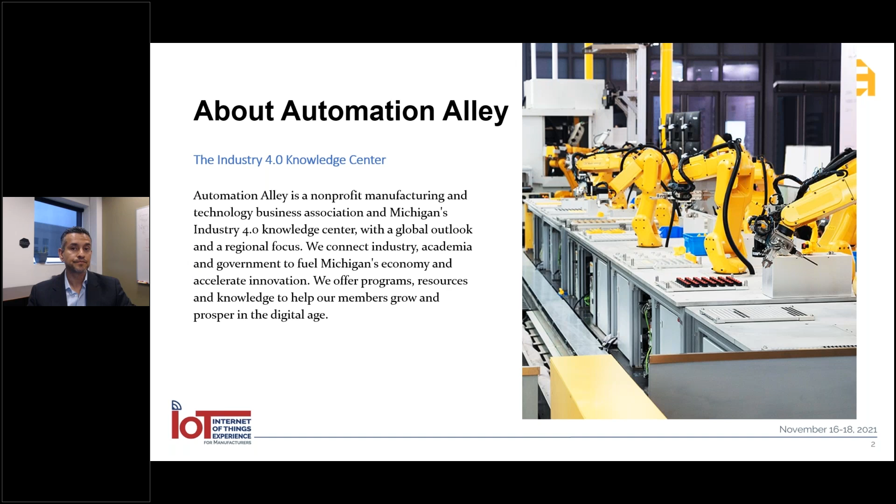So Automation Alley, we're a nonprofit in the state of Michigan. We are the Industry 4.0 Knowledge Center for the state of Michigan, and we've been on this path to help our ecosystem navigate the complexities of Industry 4.0 since about 2016. And along the way, we've learned a few lessons. Our core focus is really just Industry 4.0, but we really focus on manufacturing as our beachhead because that is actually a very large component of our GDP in the state of Michigan.

And the first question I like to point out is, why should you care? Why should a manufacturer that's done really well over maybe 30 years, 50 years—in some cases in our state we have companies over 100 years—why should they really care? The reason is because Industry 4.0 is the biggest disruptive force for organizations that we have seen. It truly is a revolution, not just a little shift. It truly is a quantum shift, and we'll see why as we go down this presentation.

But the first question I'd like to point out is, why do companies get disrupted, right?

So what happens is when companies become successful, they end up having an operational focus. They become really good at doing something. And then sometimes there happens to be a market shift. And if they're not ready to navigate that market shift, then it has deep impact on business viability.

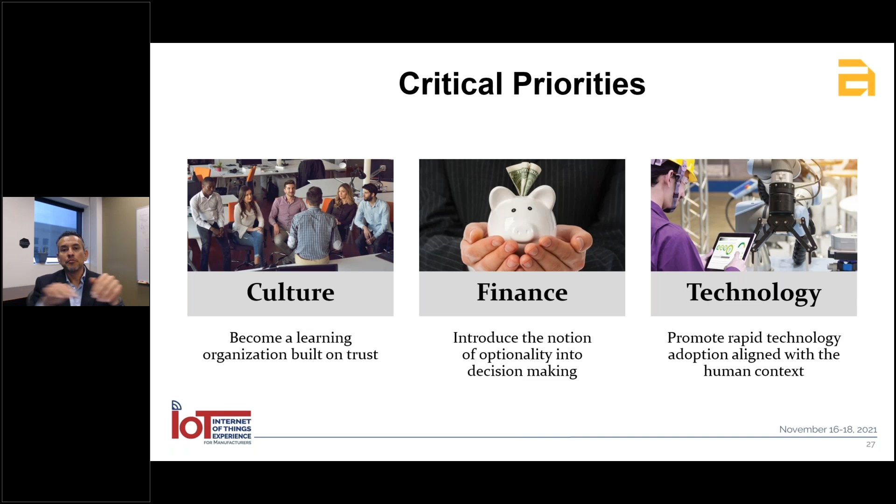And then finally, what we need to do is understand what is that technological arc that can be aligned with the human context. What is that customer experience, and how does the technology drive that? Those are the three pieces that we look at in terms of the critical priorities.

So with that, let's take a look at this case study I want to share. Two case studies. This one is on Netflix as an organization. I'm sure everybody in the audience knows Netflix. Netflix today is producing all kinds of movies, but when they started, they were in the DVD rentals by mail business, and this was in the early 2000s. They were really a fulfillment shop. They really knew how to very efficiently deliver DVDs by mail to customers who had put them on a DVD queue.

But from that, they graduated and evolved into third-party streaming. They were basically streaming third-party content in the mid-2010s. And now that meant they were a cloud services business. They had to really ramp up their cloud services capability, understand how to deliver tons and tons of video content online streaming. Today, however, they're an original content producer. They are actually like a studio, and now they're very much into the production of original content.

So how did they make these changes? That's three different business models. And interestingly, that first business model of DVD rentals is still actually something that they have — a few million customers still get their DVDs by mail from Netflix. So they've kept these two pieces, and they've now started this third business model. Well, how did they do that? They did that by being a software-first company. They started off as a software company that happened to do DVD rentals, then happened to do third-party streaming, and now happen to make original content. So that's an example of a company that has successfully gone through three different business models.

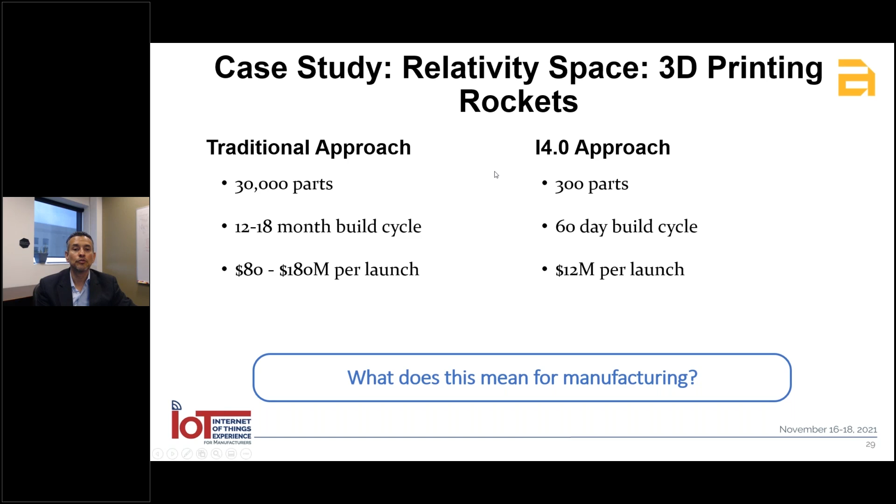Thanks, Pavan. Yeah, excellent, lots to cover when we talk about Industry 4.0. I know that some of the companies in our audience today are using 3D printing. I've seen it in the stamping and fabricating shops for prototypes and tooling applications, maybe for some maintenance and repair applications on the shop floor, but many are not. So what kind of advice would you offer to those companies that have never experienced or experimented with 3D printing, in terms of the ROI perspective? How expensive is it to get into, for sure polymer, but even metal, and the ROI companies can expect, the types of applications that you've seen?

That's actually one of those things, right? So if you've never done it, and if you're not convinced, buy a small printer and play with it. It's not going to produce production quality components, but it's going to start giving you ideas, some really interesting thoughts in terms of where this could go. If you have a little bit more faith in the technology, buy a production-ready printer. There are now production-ready printers that can make components that can actually go into usable parts in the less than $15,000 range. Some of them are even less than that.

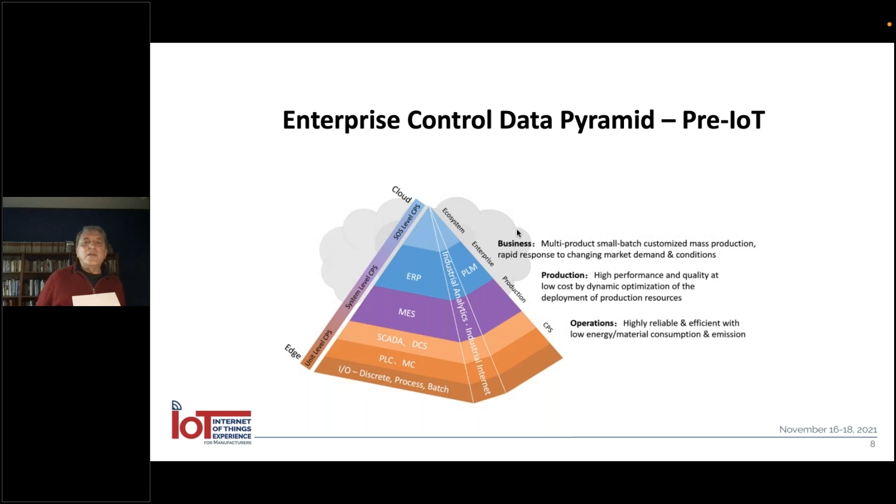I'm a controls person, so we had something called the Enterprise Control Pyramid. Nothing like Maslow's pyramid, thank goodness. But the people in the room when this was invented didn't think it was going to last as long as it has. All I wanted to show here was, in a past life in controls, automation, digital software, people visualized data flowing pretty much one way. We had the physical layer, the I/O, discrete process batch stuff, and data flowed up to the control level, then to some sort of SCADA level, then to an MES level, and so on. That was the paradigm for a long time.

So this, I call it Internet of Things equals connecting things equals a data explosion, which is why we need servers and maybe buying a big chunk on AWS, remote cloud servers, because we're going to store it, but we're going to store it because we can use it.

So I want to tell a story. This is a refinery story, but don't worry about it, it is applicable. It's just one of the best Internet of Things case studies that I've run across. But the story includes a party van, coyotes, insurance companies, an IT department. Oh, and it's about refining, flammable materials, and safety.

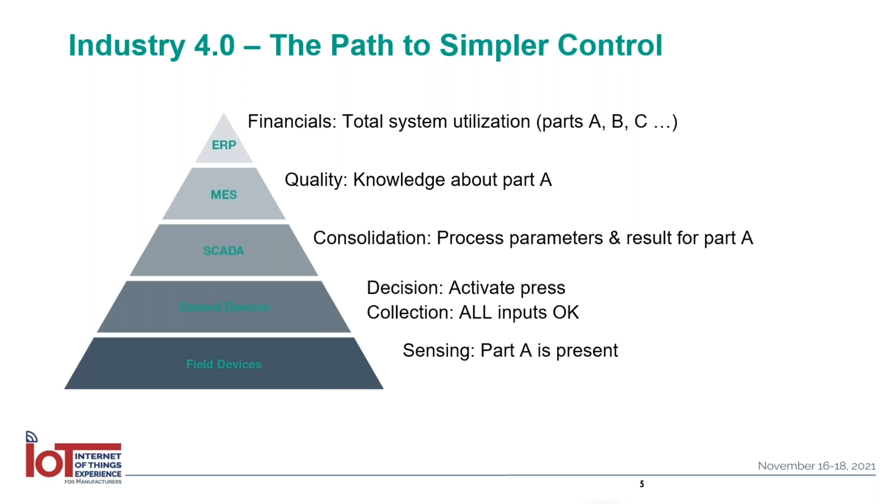Field devices, for instance, are where one would identify the presence of a part. Then the control devices, PLCs for instance, take in that information and make decisions. Should I activate the press when all the inputs are okay? The PLC will then consolidate information and move it from SCADA to MES, maybe even up to ERP, where financial decisions are being made. How am I doing in terms of parts utilization? What have I produced? How much waste did I have? And so forth. So this is the model we've all been used to.

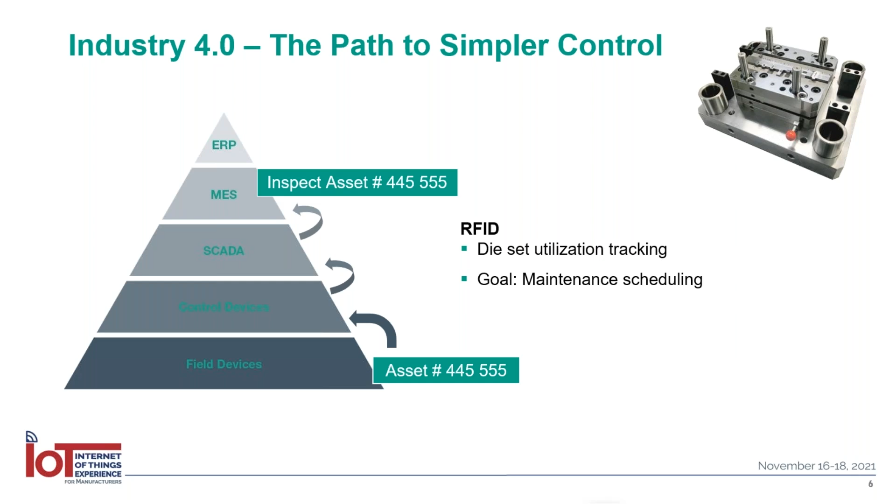If I break this down to a couple of examples, specifically think about an RFID tag being utilized on a die set. If at the field level we identify this asset by some asset number that's part of the RFID system, we can move this information through from the PLC to SCADA to MES and determine the utilization. The goal is to be able to determine when maintenance is most advantageously handled, before something breaks down, before something goes out of alignment.

Another example is vibration sensing. Vibration sensors can provide information according to this ISO standard I'm listing there. On the right side, you see a table that tries to classify what type of machine will run well, not so well, or actually goes into damage mode at what levels of vibration. So we can configure the system, determine what the vibration values are, and pass them through the system.

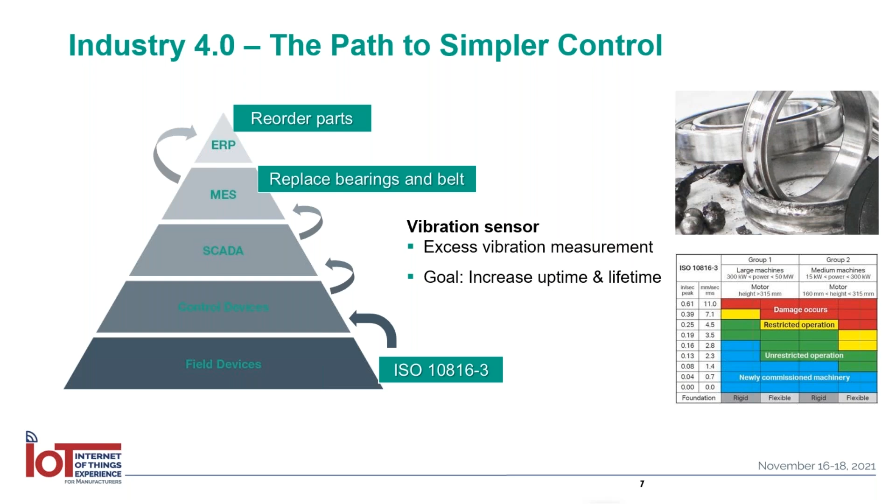The goal again is to replace, let's say, a bearing or a belt in time for this machine to not even run into downtime. And then ultimately, at the ERP system, when this information is available, reorder the parts so that we're never going to run out of this bearing, or never going to run out of the belt that's needed to keep it running well. So information is passed up and down this pyramid.

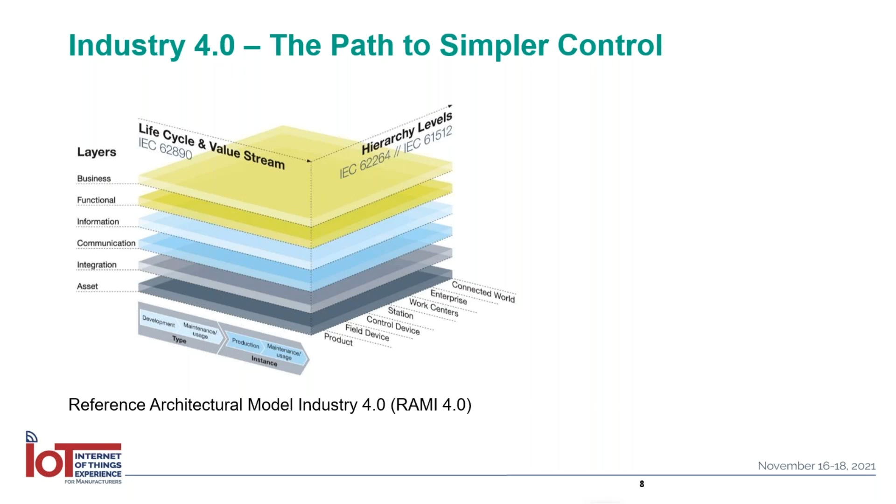In the RAMI model, the world is a little bit more complex, or I'd rather say a little richer, in that we still find this pyramid structure along one axis - these are all the layers of the pyramid. But what is very different is that we don't have to bring data from one to the next, not from the field device to the control device to stations to work centers and so forth. Communication can now occur essentially in any direction between any two participants in the setup.

This is extremely useful because it makes data flow so much simpler. I do not have to bother the PLC to take in data from the field and send it up. I can have the field device make information available, and anybody else that needs it at any point in time can directly communicate with this field device. So this is what is considered a flat IP network - everything puts information out there for everybody else to use at the right moment in time.

Another new aspect of this model is that we're now considering the lifetime of an asset from development into the full utilization part. I will today focus on the second phase, when a product is an instance - it's no longer just a catalog item, it's a specific sensor, a specific PLC, it could be a specific cable. And what I'd like you to see today is something that was worked on over the last few years. We call it the digital nameplate.

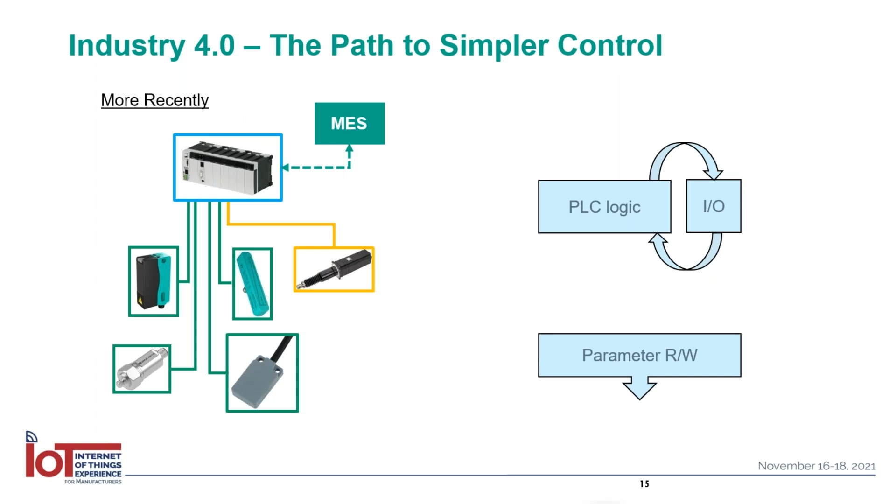Now, more recently, some smart people thought that's really not a good way of dealing with hardware. It would be much better if the PLC had the ability to change configurations of hardware on the fly. That allows us to automate, highly automate, replacement procedures. So one product gets replaced, and the person that does the replacement no longer has to really do anything with it. Put it in operation, and the PLC identifies that something new showed up, and it downloads the parameters. The rest of the operation, the logic, the I/O consumption, setting of outputs, is exactly the same.

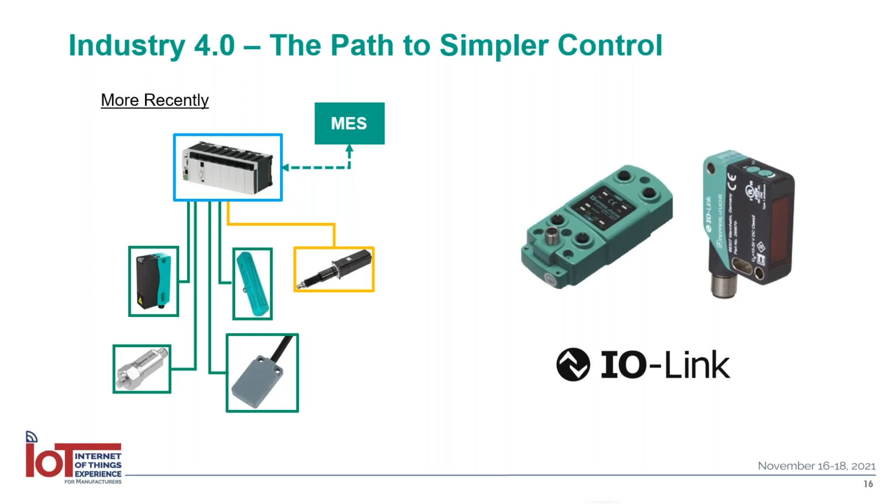And most of you have, of course, heard of IO-Link. IO-Link is a low-level point-to-point communication scheme between controllers and sensing products. Sensors can be, just as the word implies, photoelectric, inductive, capacitive, but could also be RFID systems, or stack lights. All of these kinds of products can be configured by the PLC to do whatever needs to be done. So here's an example.

I'm showing you there an ultrasonic sensor, and this ultrasonic sensor... did I lose my connection? Brian, can you still hear me?

I can hear you, but I cannot see your presentation. Okay, well then, wow, that was weird. I have no idea what happened. I gotta... you're on the phone, right? No, I'm going through the audio connection. So let me, hopefully this picks up where it left off. Okay, I'm sharing again. Now, would you? Yep, you're back. Oh, all right, I'm glad it happened.

So these are two ultrasonic sensors, and what can happen here is that via PLC command, via PLC control, the beam pattern, the beam width of this product can be changed on the fly between every single product if necessary. It's very easy, go wide, go narrow. So this allows us to focus the ultrasonic beam to match the product we're producing, and therefore we can have various products running over the same line. They could be quite different, and the sensing technology can be adapted to the needs of this production step.

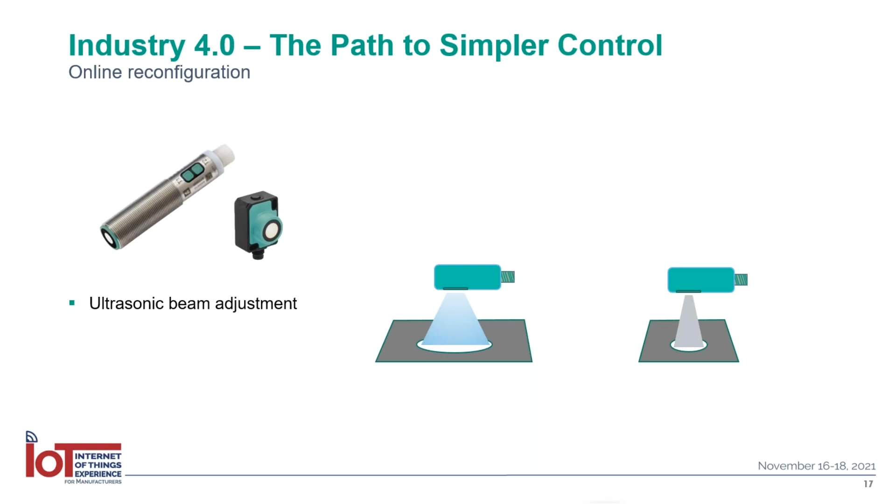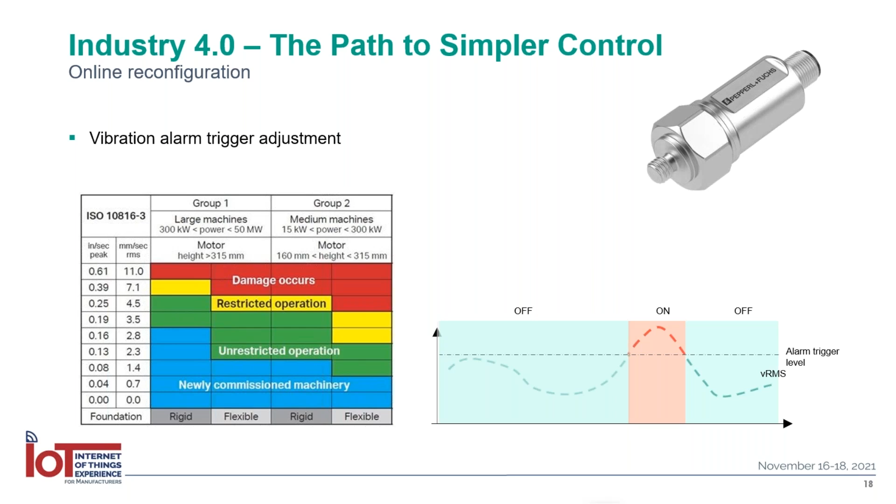Another example, already mentioned, vibration sensors. Vibration sensors will measure, for instance, the speed, the VRMS value of the machine, the vibration spectrum, and it's possible to set trigger alarms. Similarly, via this IO-Link methodology, we can change the allowed or accepted level where this alarm will trigger. So we can make this dependent on certain functional aspects of the system.

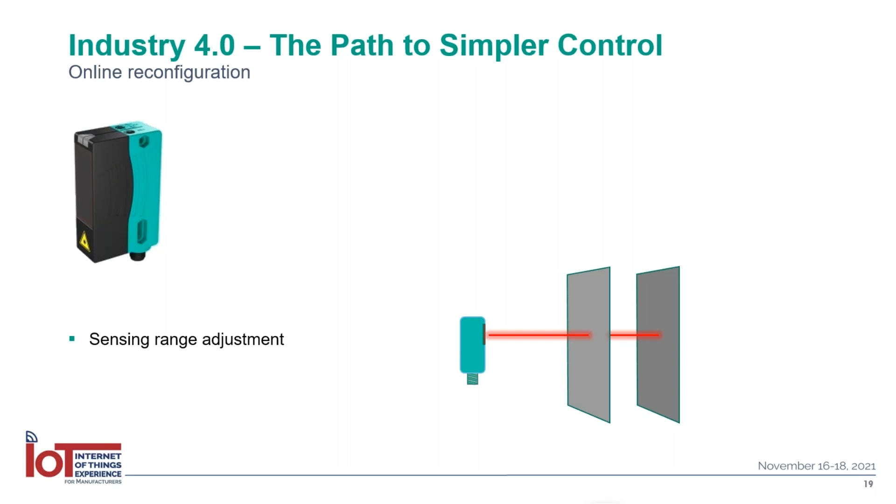Another common example is changing the sensing range of a photoelectric sensor on the fly, switching between near range, say 0.5 meter, and far range, 1 or 2 meters, whatever the technology allows. My last example shows a rotary encoder where the pulse rate can be configured via PLC control. Sometimes short pulses are useful, other times much longer pulses between so many pulses per revolution. This flexibility comes with IO-Link sensors.

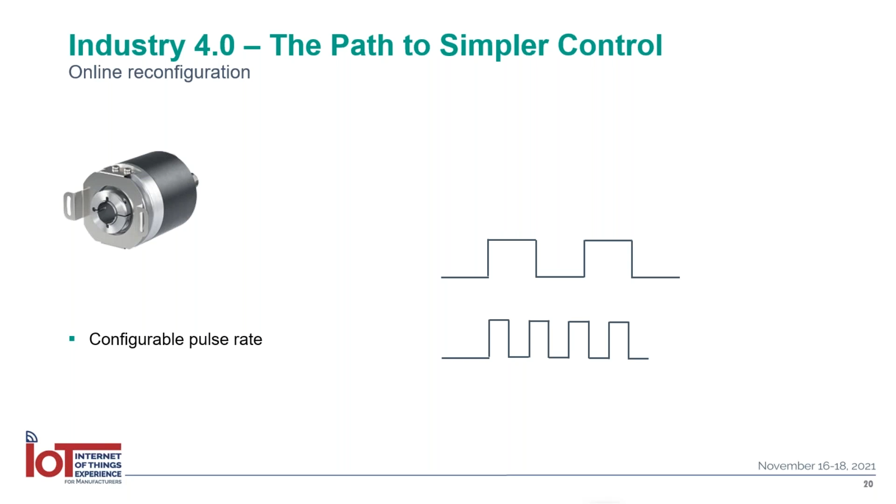If we go to the next picture, this is the now and today state, and we're going to expand this even further. The difference now is that we're separating control that runs on the PLC from configuration and ingestion of feedback information. We're utilizing IoT technologies, OPC-UA, MQTT, Modbus, REST interfaces to make changes to the product without having to modify the PLC. At the end of the day, the outcome at the sensor level is exactly the same.

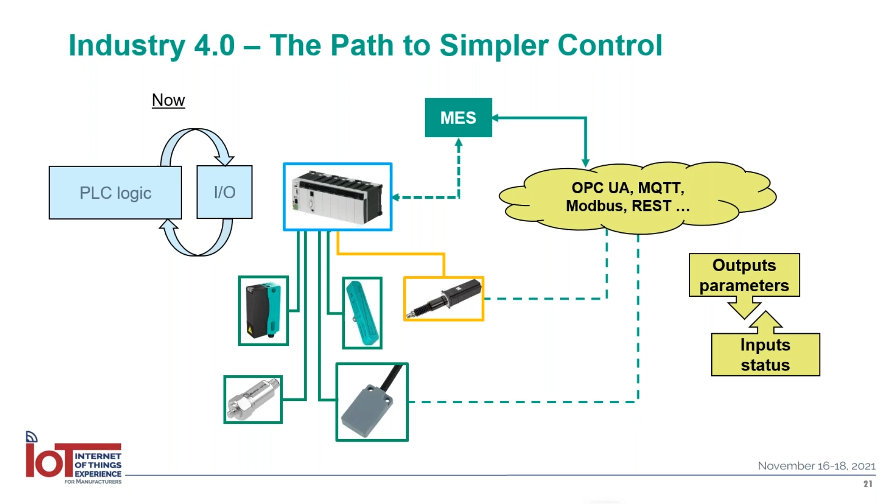The sensor is set up to do something specific to the process. The major difference is that I don't have to use the PLC to do that any longer. I can use modern high-level languages that make it a lot easier to make these changes, then get it down into the sensor via these technologies. In parallel, I should mention this requires zero additional wiring, and I have some pictures that show that.

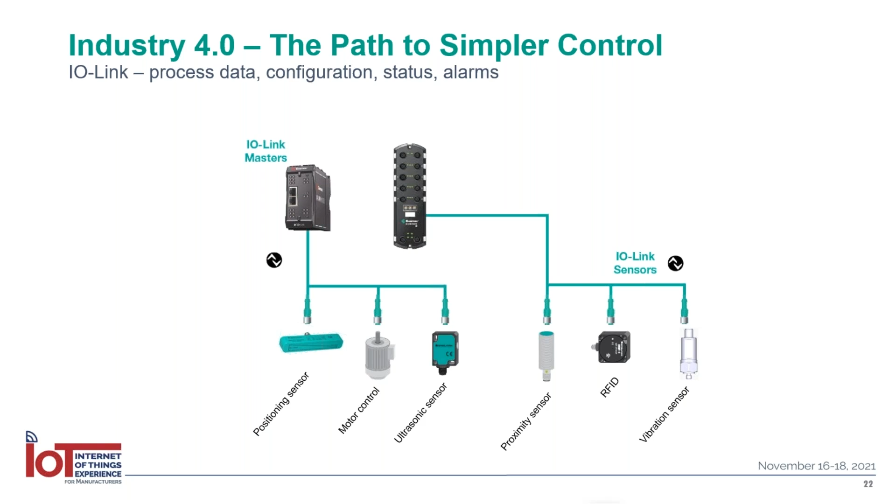Here is an example of an IO-Link master, actually two IO-Link masters, and a number of products connected to those. These products feed data into the master, and these IO-Link masters make this data available to the PLC. The PLC could be essentially any type of PLC, we really don't care, we're very sensor or PLC agnostic. Could be a Siemens PLC, Rockwell, Mitsubishi, you name it, any type of PLC that talks one of the supported higher level protocols of these IO-Link masters.

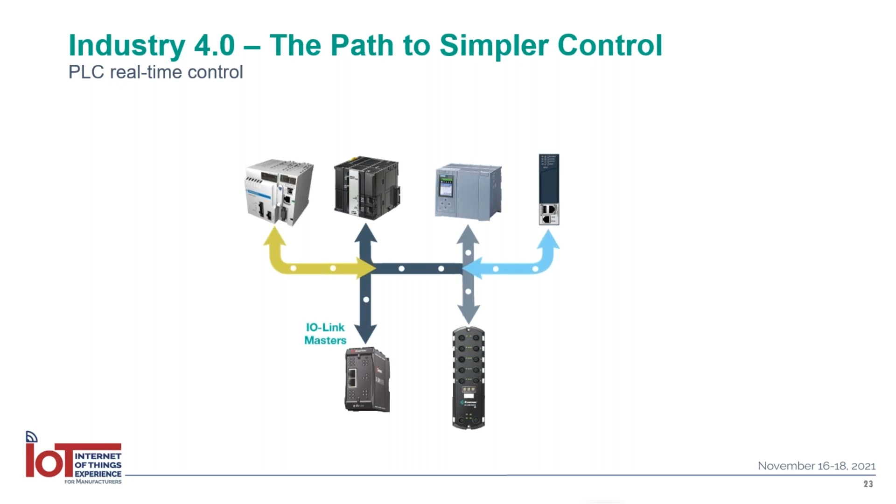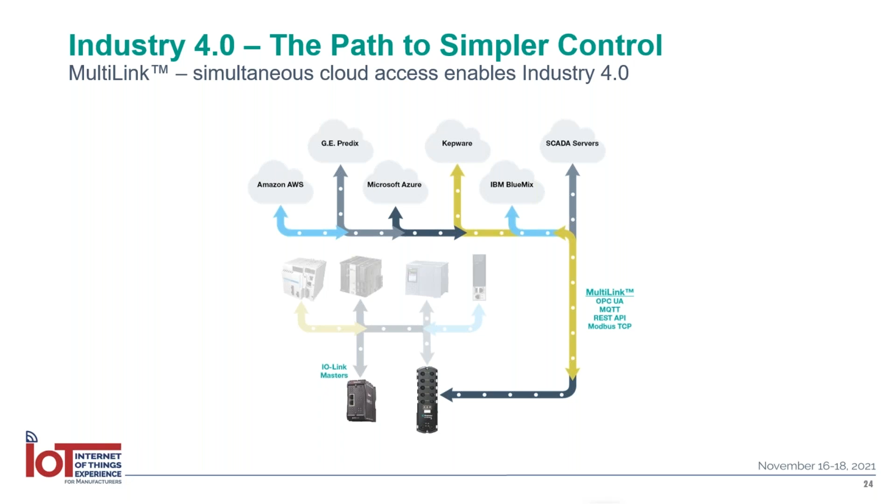Now this parallel data channel that runs on Ethernet using the idea and concepts of flat IP networks can retrieve any of these additional data points that these sensors may provide. They can retrieve other data, exactly the same data as the PLC already gets, and they can take care of configuration and diagnostics, again without having to wire anything specifically to these products. So this is what the end picture is like: from the field to the PLC, we go the standard route via real-time control networks, Ethernet IP, Profinet, you name it, but to the cloud we go in parallel utilizing IoT-centric protocols. The MultiLink technology we've implemented allows us to do this in parallel.

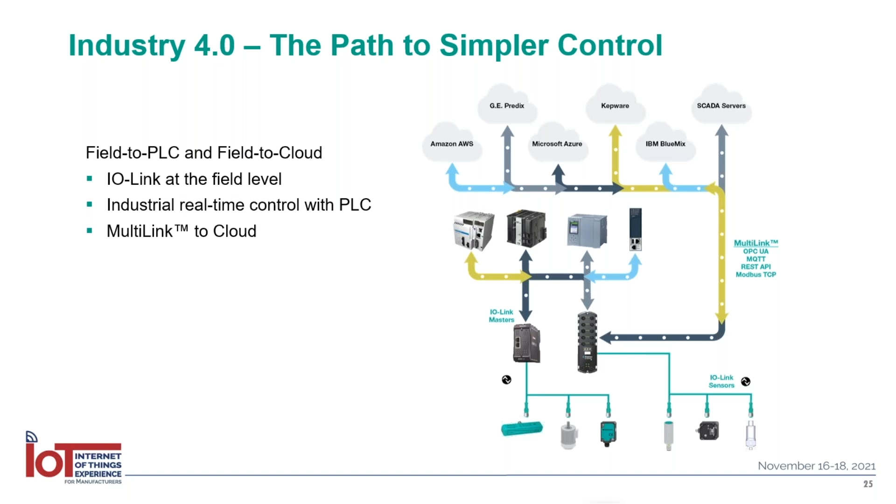So that's that part. The other part dealing with enhancements to sensors is the digital nameplate project, Icebreaker. Icebreaker was an event by a number of companies to prove that we can have instance information about a specific product available on the internet in an easily retrievable format - instance management, digital nameplate, according to IEC 61406.

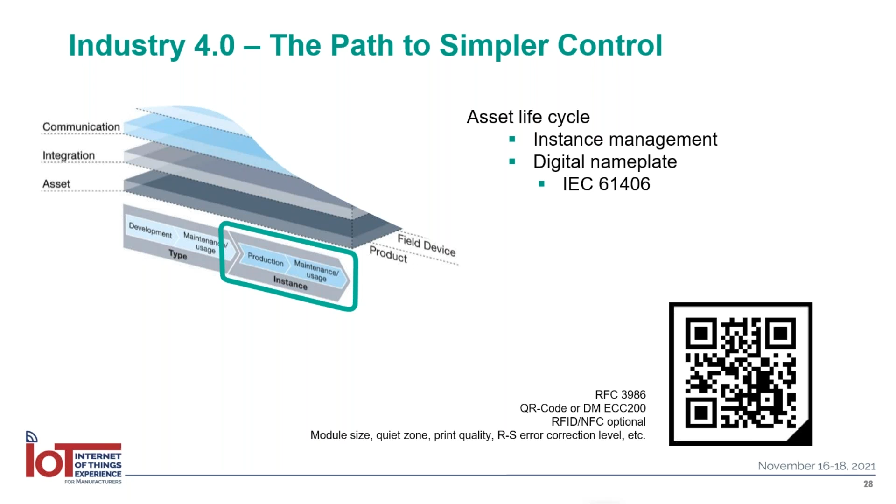What does that mean? It means that a product will now have a QR code, and that QR code links to a database specific to that product. So two items that look exactly the same, for instance a photoelectric sensor, will not have the same QR code because they are ultimately different instances of this product group. You can take a photograph with your smartphone of either of those two codes, and they will lead you to a page specific to this product.

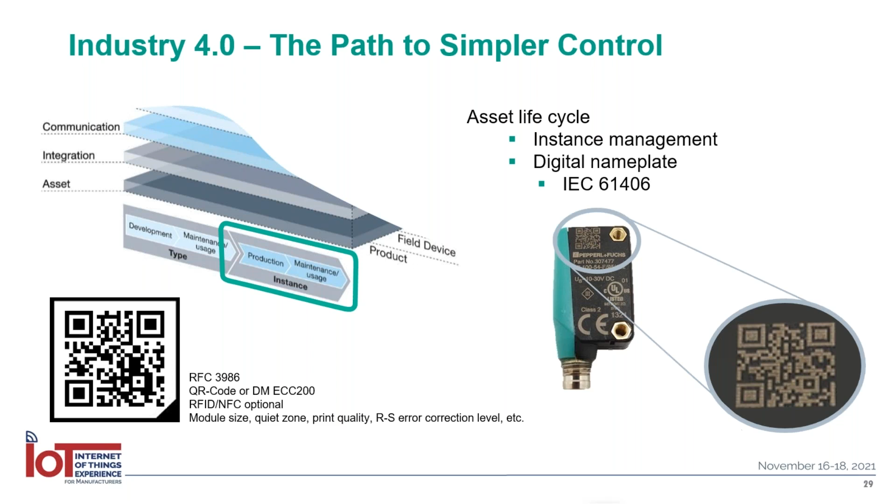I'm going to keep going on one, two, and three. Hopefully someone has done it. What that will do is load this page, and this page on first glance looks very much like the standard page one would find on our web page. But what's different here is, as part of this trial, we now show the serial number and year of construction of this product.

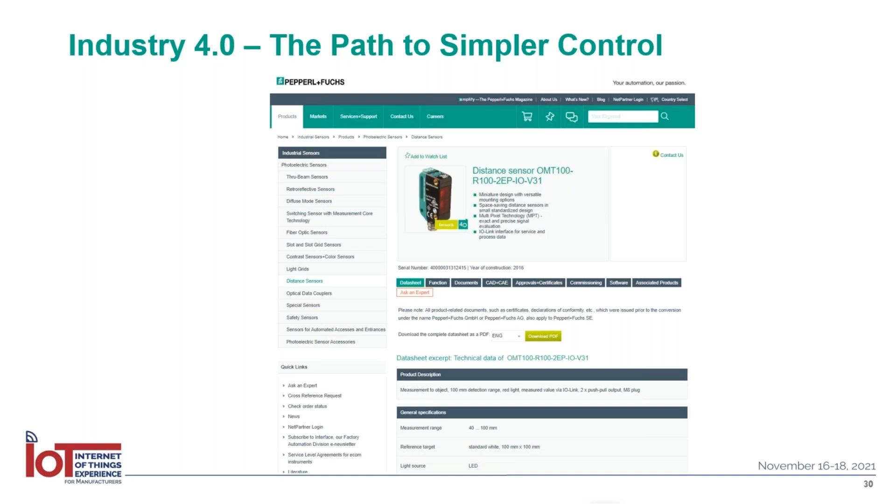Right now, this is, in my opinion, not very pretty, but the point was: can we set everything up behind the scenes so that a customer, a machine owner scanning that QR code, can come to the page and retrieve all the information required on a family basis - data sheet, approval certification, software associated with this product - while also having this very specific serial number and year of construction information. This is not limited to those two numbers, we just used those out of our internal database to prove that in principle it's possible. There's a lot more information we could put out there, we don't right now, so this is just the starting point of this project - the digital Icebreaker project, digital nameplate.

Now, as a machine designer, you can have access to this information and turn that into your own information that you would provide to your customer. So it follows the onion shell idea of the digital twin: take some information, add more, add more, add more, and make the onion grow.

Last section I want to talk about is a few more examples on sensor advancements and how they help with respect to predictive maintenance. What can these new products in conjunction with IO-Link really do to enhance processes?

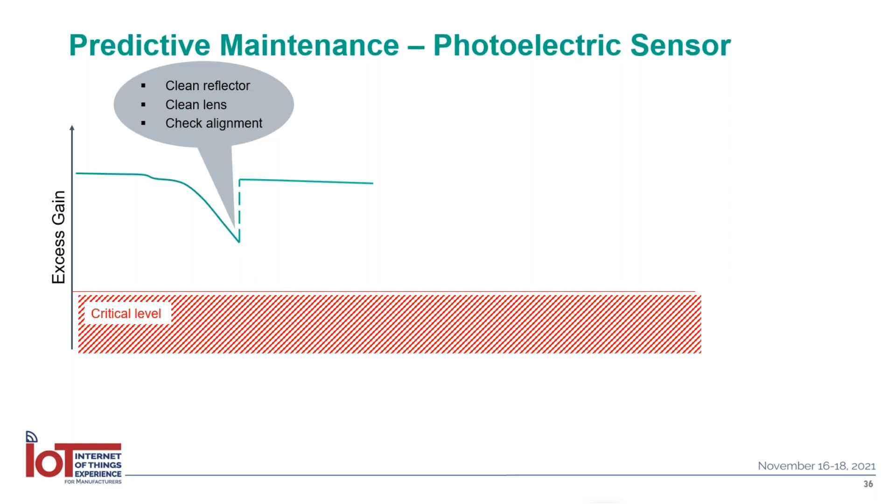So let's say we did send this message out and someone went there and cleaned it. Machine never stopped running. We're back to normal. And then all of a sudden we have such a sudden drop. Now that's a different scenario.

Whereas a gradual drop predicts or has to do likely with dust or some other pollutant. When you have this sudden drop, likely we have something being knocked out of alignment. And so now we're definitely going into the critical.

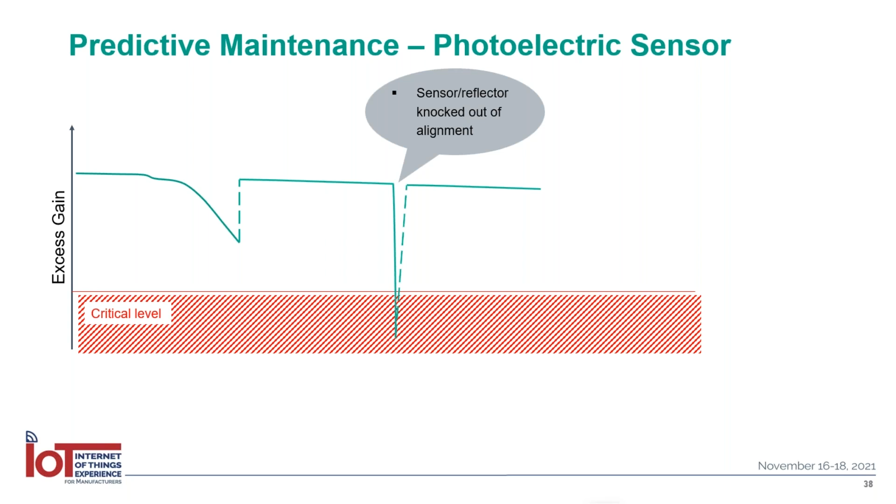We can't help it, it's too late. But we can help maintenance by giving them hints. Please check this. There's a certain likelihood that this has nothing to do with dirt, but it has something to do with alignment. So they fix it, we're going back up, everything is good.

Now, what did that whole scenario, that entire story that I told you, what does that look on the output side, the digital output that goes into the PLC? So as long as the sensor is above the critical level, the excess gain is above the critical level, the output will function. Nothing is going to happen as long as we get in before we reach the critical level. Once we hit the critical level, then the output is no longer able to follow the signal.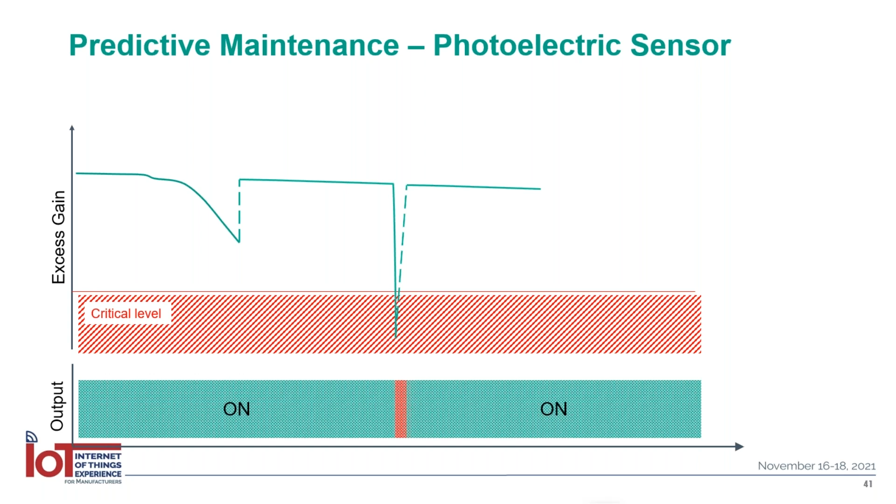So we fixed this, obviously, so we remain running. And then here, for the short amount of time when we go below the critical level, the output is unfortunately off. So this is one way of helping diagnose and prevent a problem.

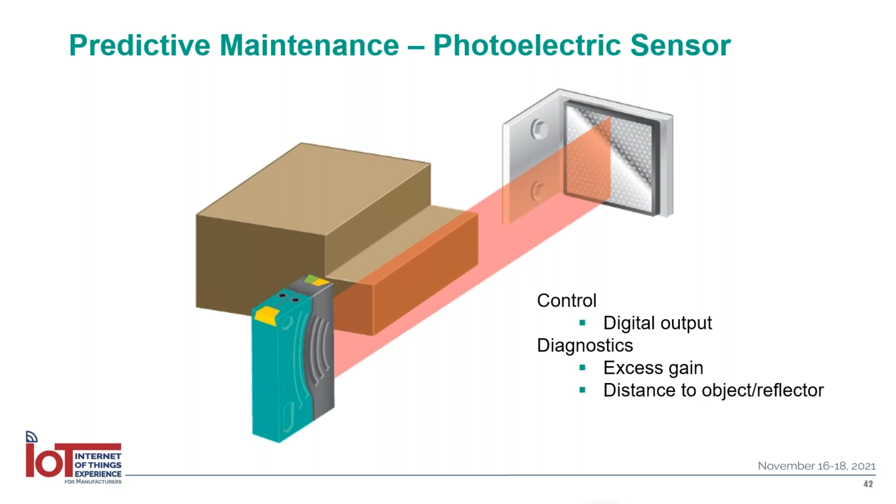The other thing that these sensors can do is they can actually measure distances. They're not just looking at return signal, but they can measure the distance not only to the reflector, but also to the object. So if you think about it, when this object goes through the beam, what happens? You see sometimes you measure the distance to the reflector, and then sometimes you measure the distance to the object.

So there are two ranges, there are two specific cases that are of great interest. One is pre-collision. What if an object were to be detected that's coming too close to my sensor? Collision is never good because it destroys the product. You have to replace it. You're down for a while.

Similarly, if something goes out of range, what could be the reason? Well, one reason could be that vibration shook everything loose and the reflector is not fixed anymore, and it could essentially fall off eventually. So this is a case here where we have a pre-collision. This item is clearly too close. It has not yet hit the sensor, but we don't want it there. This would be an alarming condition.

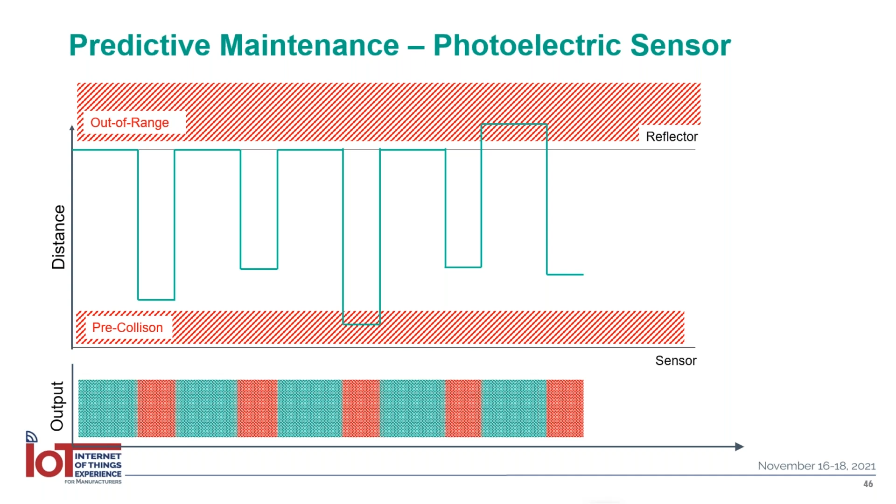And similarly, when the item appears to be that far away that it's out of range, something definitely did get knocked out of alignment. And very similar on the digital output level, we would see one state when we see the reflector and the other state when we see the object. And depending on the logic that's applied, the output may be on or off. But again, important is the ability to identify problems, potential problems before they show up.

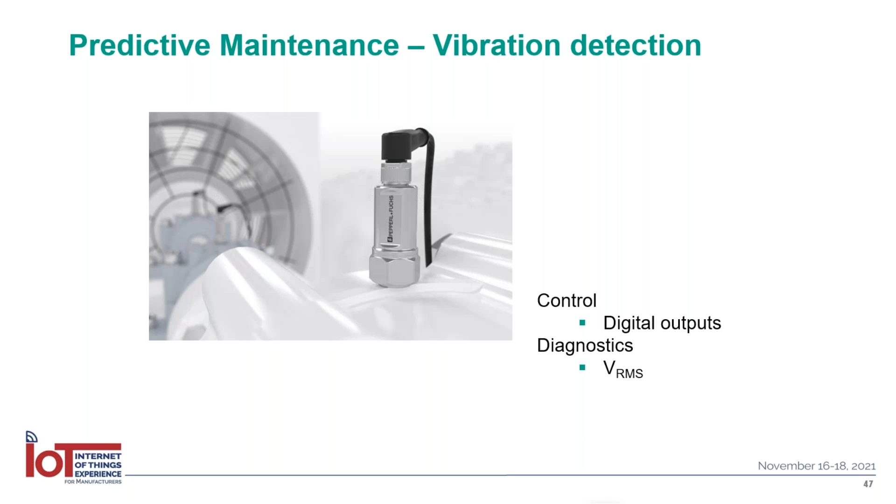Vibration monitoring is, of course, a very interesting and very powerful topic. I already mentioned that we can configure these products to have outputs that essentially give us worst case scenarios. But we can diagnose more, in greater detail, if we look at the true value of the VRMS that is provided.

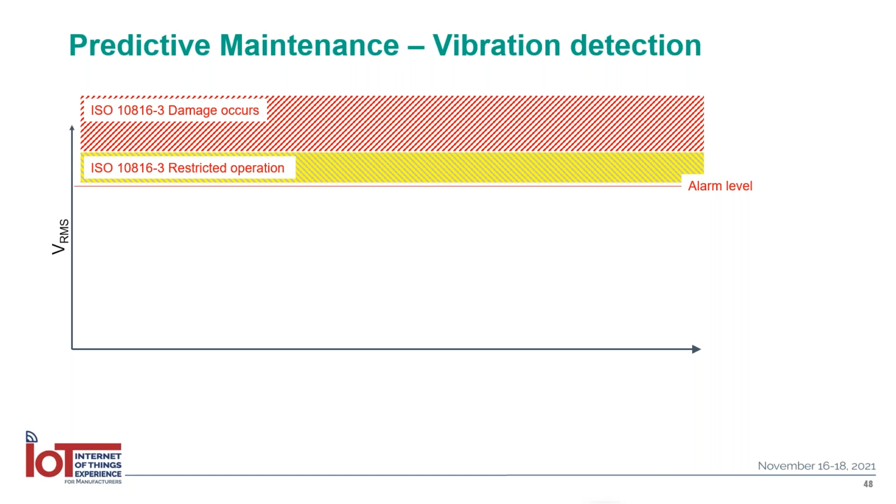The picture that I drew here shows we are looking at two levels. One is, according to that standard, what we would call restricted operation. You may have to reduce the speed of the operation in order to limit the vibration spectrum. And above that, once the vibration goes even higher, damage will certainly occur.

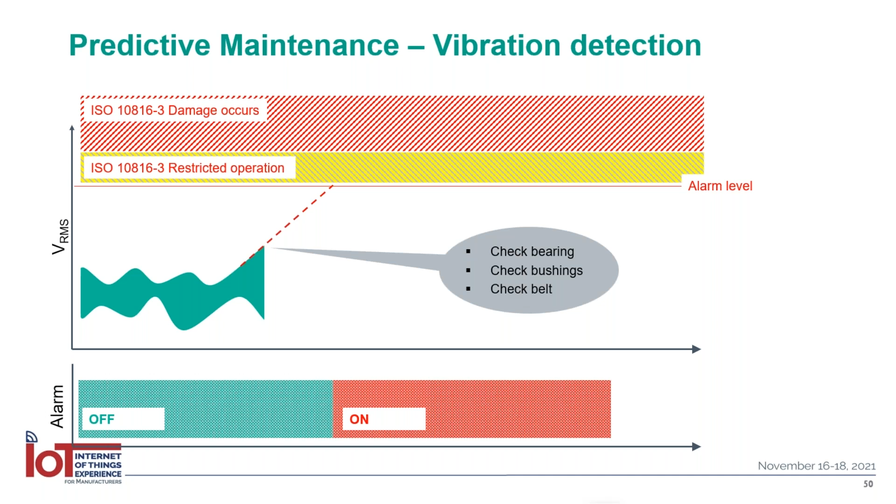From a digital output at the PLC level, as long as we have not reached the alarm level, the alarm output is of course off. There's no reason for alarming until I reach that level. Once I reach that level, the alarm output goes on. That's all fine for an immediate shutdown of the machine to prevent further damage, but it's really not so good if I want to make predictions, if I want to send maintenance out during regularly scheduled intervals anyway. So this would be a much more powerful method.

So let's say they fixed it, and the world is good, because everything is now back in the normal spectrum of vibration that we expect.

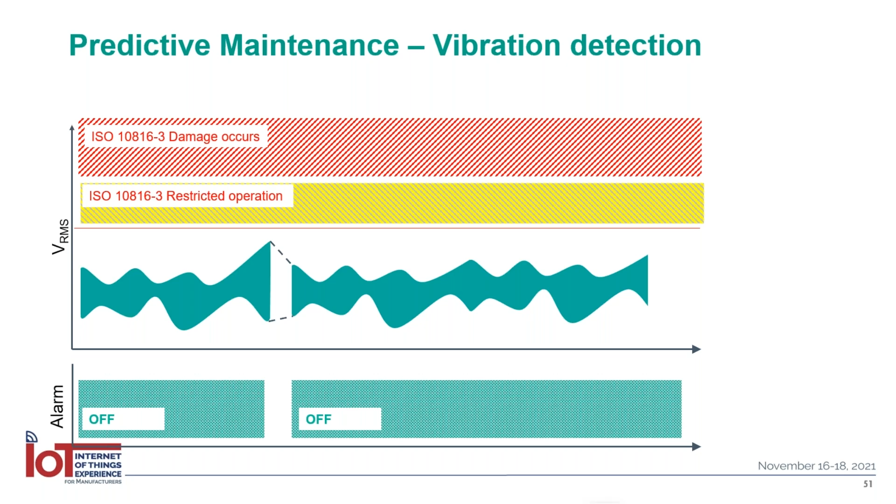Let me propose 3 takeaways from what I'm trying to talk about. Modern sensors allow the separation of control and diagnostics. Not only can we separate it, but we can also feed that information to different systems. By utilizing our multi-link technology, we can have control going to the PLC and diagnostics going to cloud structures or other PCs with much more computing power that can run predictive models. And the component involved in all of this is clearly IO-Link.

IO-Link is the new standard sensor interface in the market. It is growing by leaps and bounds. I dare say there will be participants in this webinar that already use IO-Link and may not even know it, because IO-Link has been around for 10 years and a lot of product has been designed around the IO-Link standard. That's the conclusion of my presentation.

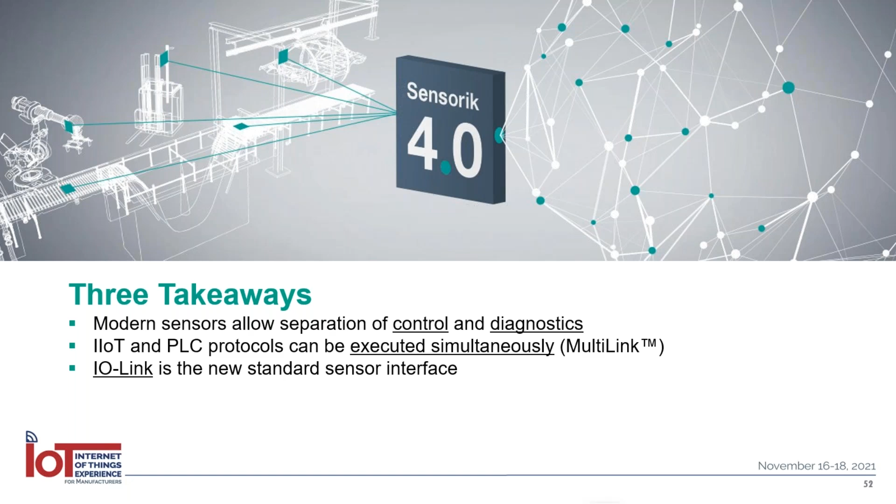Thank you very much for listening, and I understand we'll be having some Q&A now or after Brian's presentation.

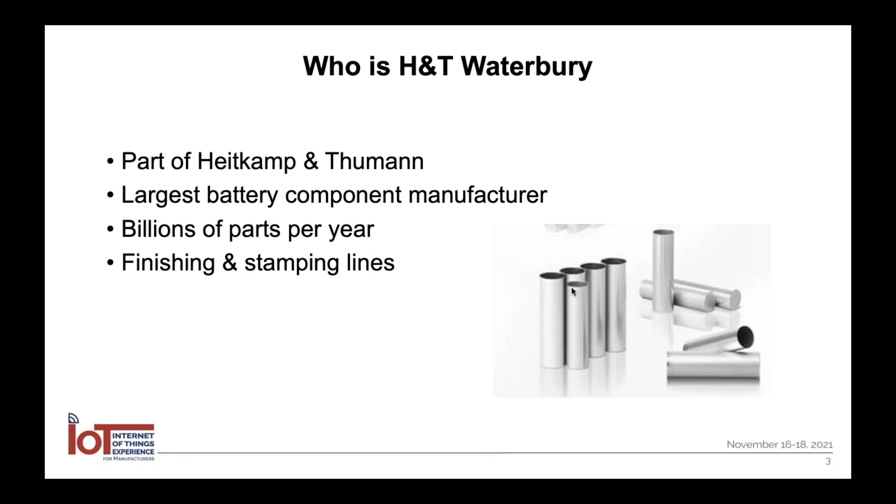So the original challenges that they had when they reached out to us 2.5 years ago was a lack of visibility of what was happening inside of the plant. They had a lot of manual reporting - production, downtime, scrap rates, all that stuff was being reported on paper, summarized into Excel, sometimes tacked up on whiteboards and communication boards. A lot of companies do this. I'd say the majority of companies still do it this way, and it works. The challenge is you don't really have timely access to the data, so understanding what's happening now is a little bit tough. Also, looking at trends over time can be hard if you're trying to pull together, let's say you want to understand what's happened over the last quarter. You're going to have to pull together 120 different spreadsheets or tabs to be able to summarize that data. It's a lot of work.

And the other problem is that if you're looking for really fine-grained issues, like micro stoppages on a line - think a stop of 5, 10, 15, 20 seconds - you're not going to get all those because operators are not going to write down every time a machine or a line stops for 15 seconds. There's an interesting quote here by Spencer Cushman, who's the director of operations for this site and our primary contact and executive sponsor for this implementation. He said, before implementing SensrTrx, we knew there was a problem. We just didn't realize how bad it was until we started collecting the data. This is a very common scenario. We work with a lot of companies that have this same view: we know we have inefficiencies in our processes, we just don't know where they are because we lack the information to really find them.

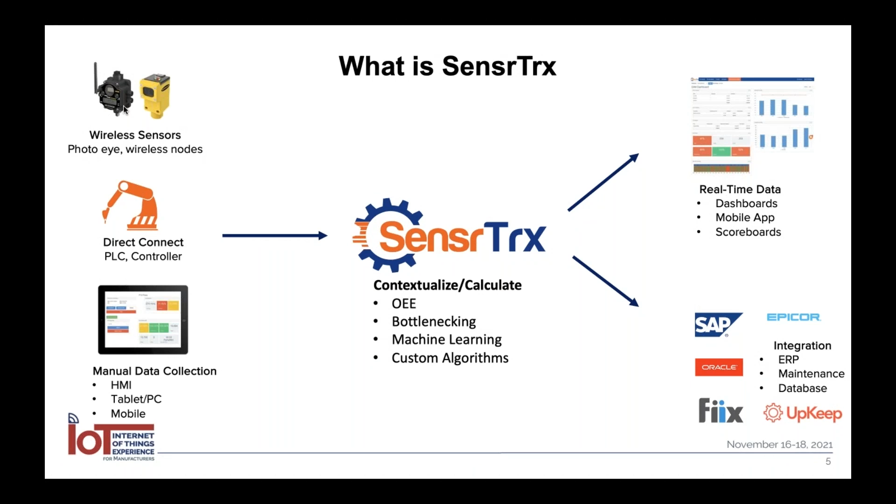But when you're connected to the PLCs, if they have the right kind of information in them, we can derive the reason why a machine stopped and automatically categorize the downtime reason—it's just less information a person has to put into the system. The third way is manual data collection, where anything we can't get automatically, you just enter into an HMI, which makes it easy to do.

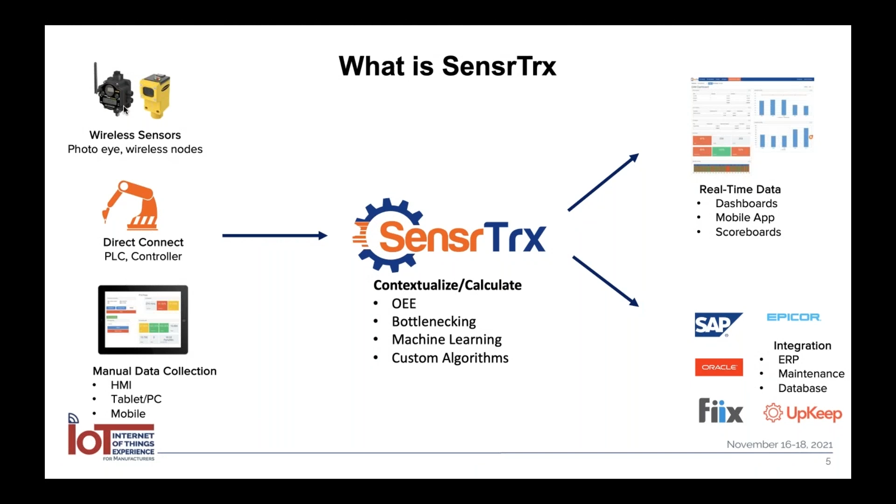And then all that data is collected and flows up to the cloud, where you get different visuals—dashboards, scoreboards, operator interfaces, those kinds of things—so that you can really run your business based on that data. And then we can integrate with ERP systems and maintenance management systems as well. Depending on time, H&T integrated with their maintenance management system, which we can talk about too.

So how do we do this? When the project first started with H&T, they wanted to start in their finishing area, where they put coatings and different things on these canisters—these little battery canisters—and that's where their bottlenecks were. So they knew that if they could figure out what the problems were there and solve those problems, that would give them the biggest bang for the buck for the project.

So all the finishing lines had Allen Bradley CompactLogix PLCs. They contained a pretty good amount of information you could use already to figure out some of these issues—there were faults inside of them to tell you if there was a problem. We could figure out machine state, we could figure out counts, how many canisters were being made. All those kinds of things existed inside the PLCs, but they weren't connected to a network. So H&T Waterbury did not want to run Ethernet to each one of those PLCs.

They thought it would just be too expensive and too challenging based on their environment, but they had really strong Wi-Fi in the plant. So what we did was we got these little Moxa boxes. Moxa box is a technical term, not really, but that's what everybody calls them. It's a company called Moxa, and they make conversion boxes.

So they can connect Ethernet to Wi-Fi. They can connect serial to Wi-Fi. So these are really good tools to connect PLCs that maybe you can't connect directly to your Ethernet network to a Wi-Fi network, or convert serial onto an Ethernet network to be able to talk to those PLCs.

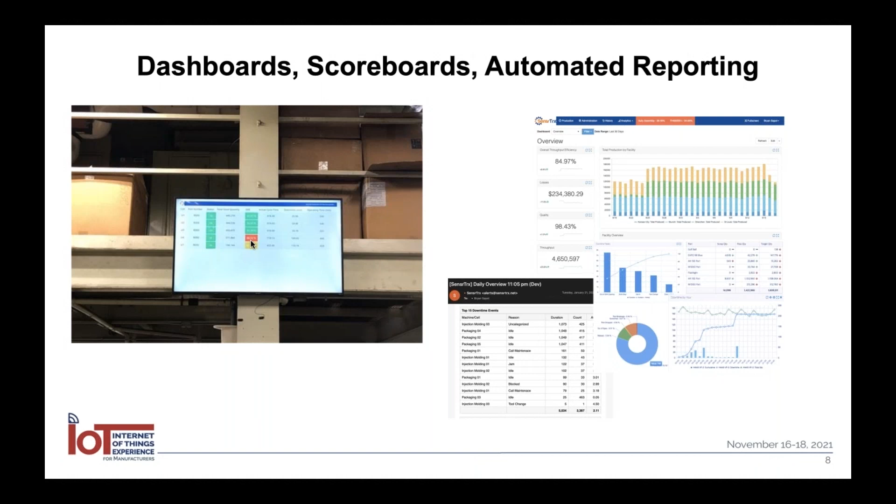Because what they found out was, we'll go into this right now, but they had a backwards can problem. So these emails and these dashboards are really what brought it to light and showed them how big of a problem this actually was.

So what's happening is backwards is kind of a misnomer, it's upside down. The finishing line sprays a coating inside of this canister, and what happens sometimes when the machine stops is a can flips upside down. So you have the bottom of the battery canister pointing up, and the open side pointing down. And if you don't get that coating inside of there, it's a bad product.

The customer has to reject it, and it becomes an issue, right, if you're shipping inferior product out to your customers.

And so what they figured out was they knew that this was a problem, right? But as Spencer's quote said in the beginning, they just didn't know how bad it was. What they found out was certain coating machines were stopping up to 1,000 times a week on a single machine.

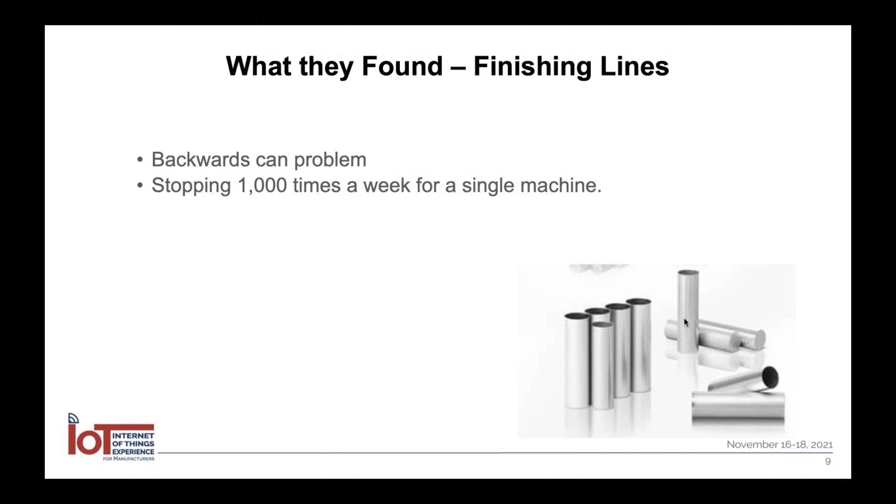And it didn't take very long to reset this, it took 15 to 20 seconds to fix, especially if an operator was right there when the machine stops. The machine knows when the can goes upside down and it stops automatically to make sure it doesn't make a bad part. So the operator would walk over, flip the can over, walk over to the controls and hit start again, and the machine would start up. So 15 to 20 seconds.

But you multiply that out across 4 different machines, it's like 18 hours a week. So it's a lot of time being spent with these little micro stoppages that they knew were there, but they didn't know how bad it was.

And what was interesting was once they got this data, you go and talk to the operators and they would say, does it really stop this much? And it's like, yeah, it's a huge problem. But the operators would never say anything because they were trained to fix it and they were told that it's not a big problem and it stops all the time. But sometimes that doesn't always rise up through the organization to be able to get fixed.

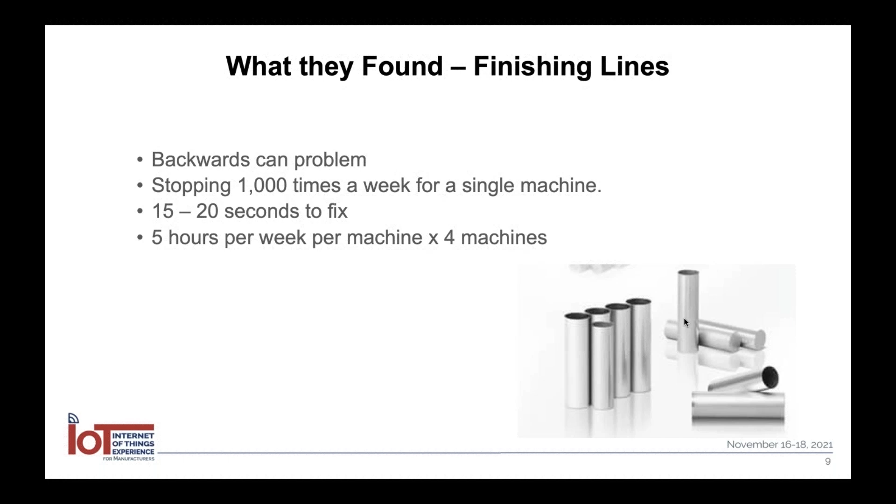And to kind of mitigate this stuff, they were running overtime on Saturdays because, you know, this is 18 hours of lost production time, it's a lot. So they had trouble trying to figure out where the problems were coming from, which is why they implemented SensrTrx. So how do they solve this?

So what they did was set up a Kaizen event to figure out this problem. And they decided that they would get everybody, maintenance, engineering, the operations team, together to do this. And they made little tweaks to the way the cans went through the system and how these air jets work and all kinds of different things. And they iterated on it.

And they looked every day at how many backwards cans they were getting after they made a change. Is it going up or is it going down every single time? And this is really how they fixed it. And this is really how all of our customers fix these things.

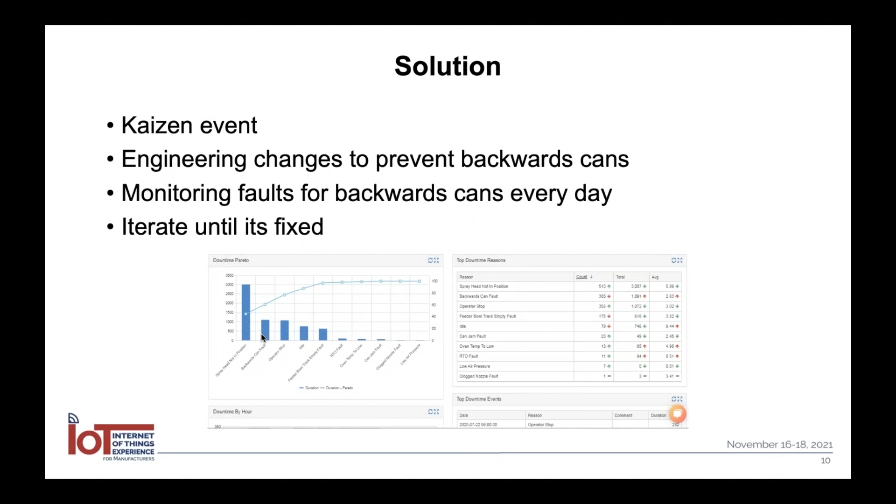You identify a problem, they either put together a Kaizen event or whatever you want to call it, a group of the right people to help solve this problem. And they keep trying different things to iterate on and fix this. They watch the data every single day to see if what they did actually fixed the problem. And over time, they were able to do it on one machine, and then they fixed it across the board.

And ultimately, what they were able to do was reduce downtime by 73%. So they had 73% fewer backward can downtimes, which was their biggest issue at the time. And so this gave them back something like 15 hours worth of production a week. That weekend overtime stopped to be able to deliver on this.

And I mean, you can imagine the amount of money that was saved by fixing this one issue, because we're losing 18 hours of productivity every single week, and they're a 24 hour a day, 5 day a week operation.

So pretty big improvement there, and really this came from the continuous improvement team. Everyone in the organization has visibility into what's going on because of the scoreboards. Different folks from supervisors, continuous improvement, and operations get automated emails out of the software so they can see on a daily and weekly basis what's going on. But the continuous improvement team were the ones digging through the data and finding the issues on where to focus, and drove this improvement.

They put together the Kaizen team, iterated on it. They were the ones watching the data every single day to see if it was going up or going down, and making things better.

So they found some other issues as well that were kind of interesting. Going beyond the backwards cans, they had a machine, another one of these finishing machines, that was throwing a fault for six months and they couldn't figure out the cause. The part of this equipment causing the fault had something to do with removing paint fumes or something from the line for these coatings that are put on there. The machine would throw a fault all the time, saying the filters were dirty.

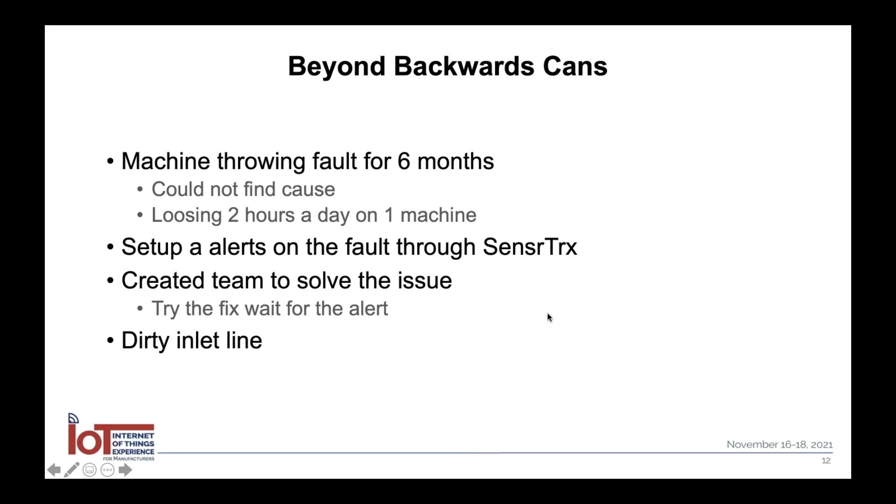So one of the other things H&T's done, and I don't have case study information on this yet, is they integrated with a maintenance management system. Since we're collecting all of this data, like how many parts were produced every hour, every day, every shift, and also how long the machines have run, we can send that data over to another system like Fiix, which is a maintenance management software that can then trigger preventative maintenance activities based on condition.

So it's a similar solution to what the earlier presentation was talking about, when you want to start doing maintenance when things maybe go wrong, not necessarily go wrong, but are trending in a bad direction.

When you think about doing maintenance on presses or these finishing lines, if they're not running very often, you don't have to do maintenance as often. If they're running all the time, you're going to have to do it more often than schedule, calendar-based maintenance would tell you. So the idea here is move to condition-based maintenance.

Your equipment can stay up and running for a longer period of time, and you only do the preventative maintenance activities when you have to, versus when maybe it's not needed. So you get more productivity out of your equipment, and if you're super high volume like these guys, that can really make a difference in terms of output.

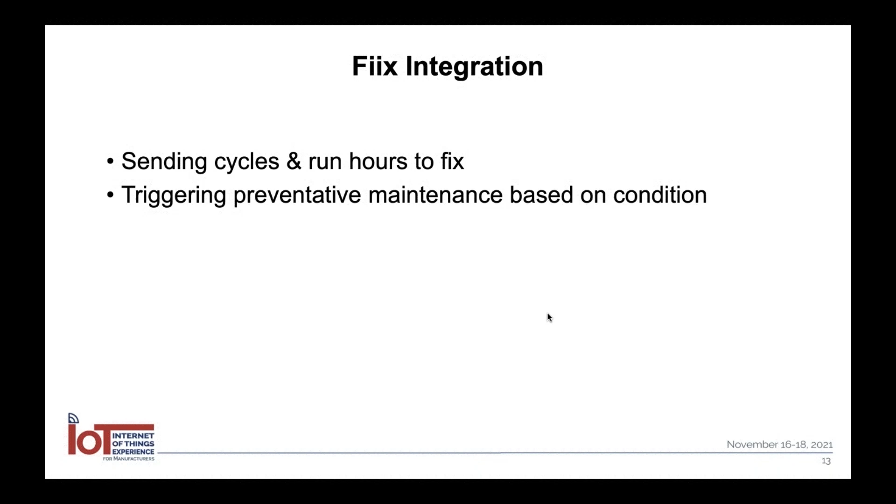And then we did an interview with their continuous improvement manager, who's no longer there, but the person that kind of led the Backwards Can project, on video. He shares a lot of additional details about technically what the issues were that they fixed, how they did it, and how long it took. But those are mostly internal engineering things that are very specific to H&T Waterbury.

So I think now is a good time to stop and ask for some questions if we have any, Brad.